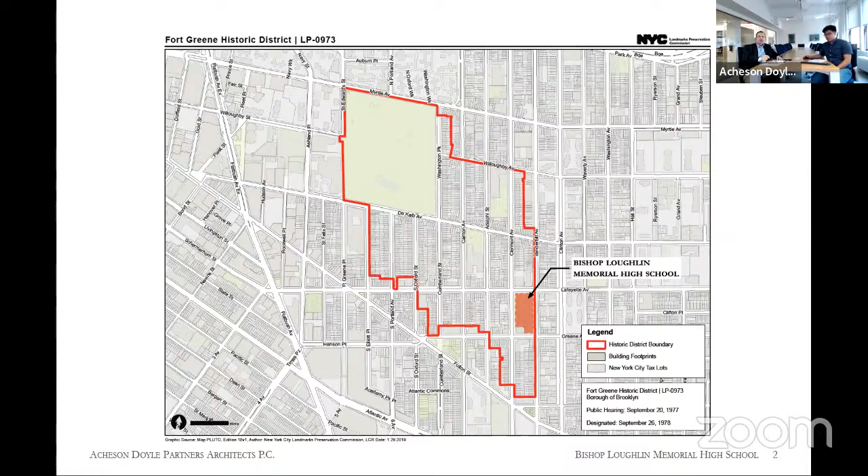So let's continue. Just to put it in context of the boundaries of Lafayette, Joralemon, Vanderbilt, and Greene, there's a large playing field to the back, large open space, which is a big part of the neighborhood.

And this shows it's in the company of some pretty strong neighbors. The Bishop Loughlin High School on Joralemon Avenue is on the upper portion, and you can see that was originally the main entrance to the building. Then when the field was closed off and the entry was put onto Joralemon to the right, it just fell into being used as access to the athletic fields.

Just before COVID, we finished about a 4-year program of all the facades. There were like 9 different facades restored under LPC guidance and great expense to the school, but it was done and it's being maintained. In fact, it looks even better than this in real life.

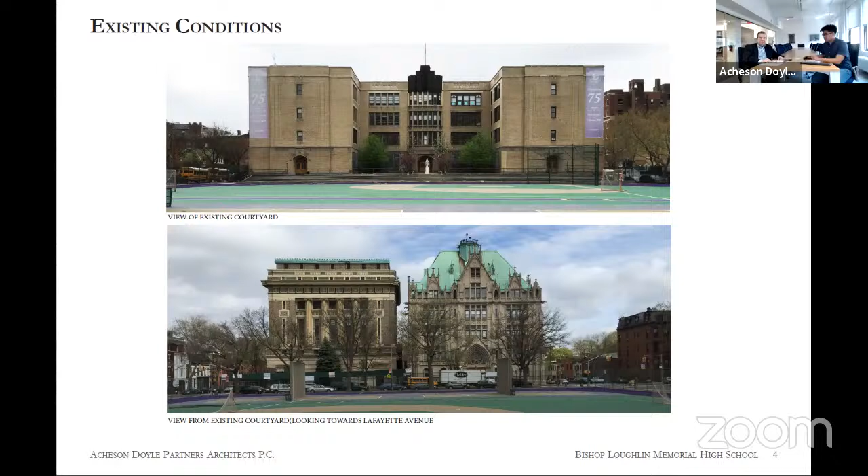And I did ask Andy to go into this portion. So we're going to go through a few of the existing condition photos. The first photo we're currently looking at is the area of the existing concrete bleachers, one of which we are proposing to remove to install an accessible entry to this courtyard and subsequently to the main entrance of the school and reactivate that space.

As Mick stated earlier, we just finished a previous extensive rehabilitation program for the school on the facades. So what we're looking to do now is provide access and entry into the space, as well as security lighting at the entrances to the doors on either side, as well as the main entry.

A few more existing condition locations, just to give context to where our existing lampposts are on each side, flanking the sidewalk, which is being done under a separate application that's already been approved, as well as looking out to Joralemon Avenue.

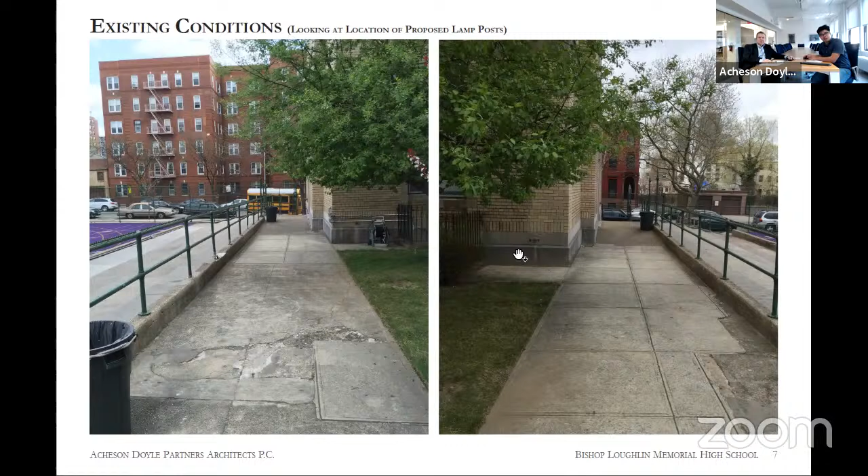This is out to Vanderbilt. A close-up photo of the existing decorative poles. We're confident these used to be lampposts at some point, as they are hollow and currently have crosses on them, but historic photographs of ceremonies show posts at the top, so we're coming back to reuse, salvage, and reinstall a post fixture at top.

A few more photos on the right. You're looking from the public right of way into this concrete bleacher area, and on the left we're looking from the upper courtyard toward the access to the field, which is the area we're proposing to modify.

This is the Joralemon Avenue entrance, which will be the main access to the school building. Those gates will be open. So just to give you context in the overall picture of the ramp and bleacher, here's what our intervention is.

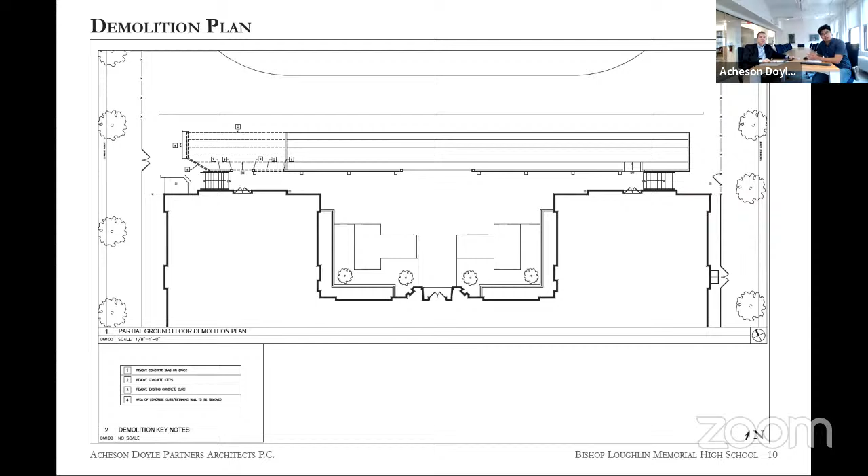We're proposing a very minimal section of the concrete bleachers used by faculty and staff to be removed, carefully integrating a switchback ramp within the parameters of the bleachers.

Due to the grades, we'll provide a three-part ramp that switches back twice, fitting within the existing dimensions of the bleachers so it feels proportionally correct, as well as providing some planting to soften the ramp.

It will be less visible, and we also found detailed drawings in the boiler room, as is typical for a school like this, of the structure of the ramp. If this can be cleanly done, the cutting out of the old bleachers will happen right at one of the column joints, so it won't be a massive cut—it'll be a more surgical removal.

The slope of the ramp will echo the slope of the existing bleachers, which are being repaired and restored all the way across with concrete. It's in pretty good condition actually, but there's a whole structure underneath the bleachers.

So this is just a quick detail blow-up. As I iterated previously, we have a three-part ramp, with some planting on the sides to minimize the visual impact, as well as a pretty standard railing detail for the ramp itself.

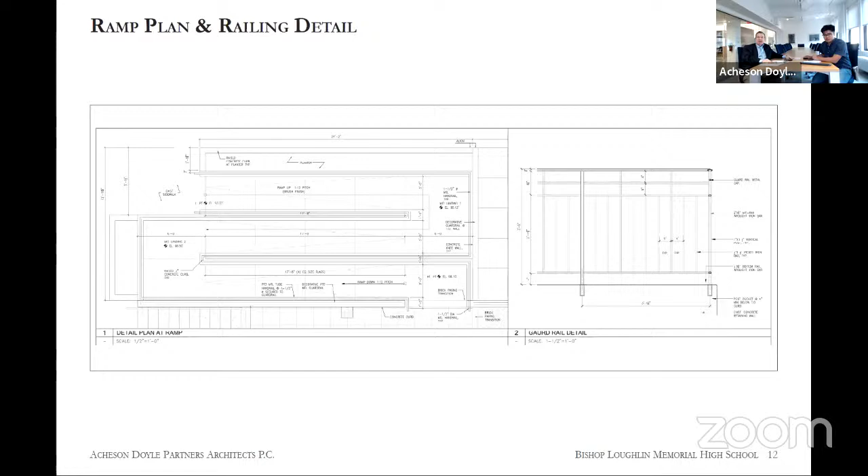So to give you context, we prepared a few renderings to show what we're anticipating the ramp to be like. This aerial view shows the wall sconces we're proposing, as well as the lampposts we're refurbishing with a new post top. This is again a very minimal intervention, and here's a bird's eye view of the space, contained to that portion focused on Joralemon Avenue, the main entrance for the students.

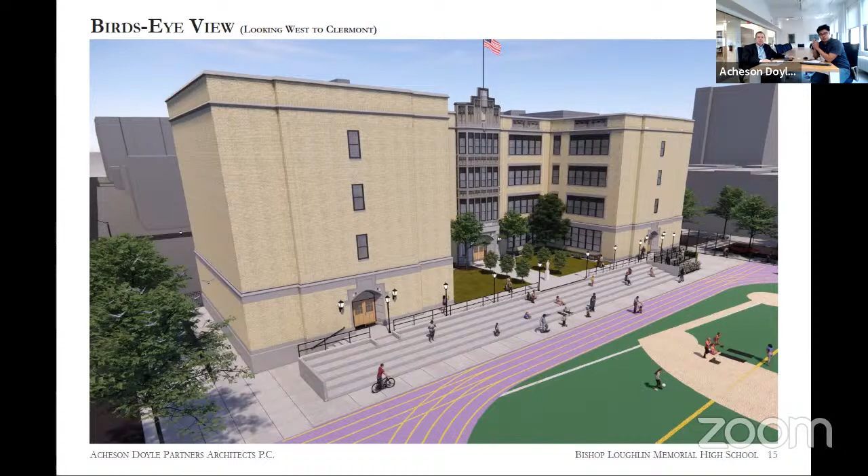We're going to go through two views, both from the Joralemon entrance. Coming into the field from that entrance, you'd see what we discussed previously—we'd have an arborist carefully curate the planting so it's not haphazard, and a ramp that goes up, as well as a stair, taking you up to one of the three entrances accessible into the main building.

Here's another view—you come in, and this is your ramp that comes up, following the person up, taking you to the courtyard level.

Just a side note, the contractor we're hiring for this concrete work is the one who did the great concrete work at Mount Zion on 145th and Convent Avenue. The other day, just as a total aside, at the Conservancy open house, I love it when a visitor drills down to a nerdy question like, who did that concrete work? Because it's important, and we feel this has got to be done really right given the rest of the building—they didn't scrimp on stone and have pretty nice masonry detailing.

A few views from the public right of way. This is from Joralemon Avenue across the street, looking at the proposed ramp. As you can tell, you can't really see it with the planting. It's very buffered. Next, another view from the proposed right of way, looking at the street. Again, it's a very buffered ramp, but you would mostly be focused on the field condition itself.

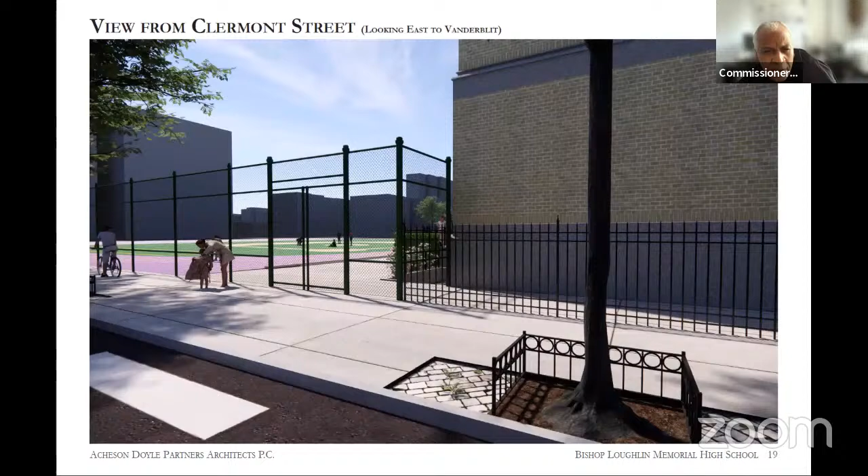Just two questions. You said this was a minimal solution, so I have two questions. One has to do with the ramp and the planting. On page 16 and 17, why do you have to cover the ramp with planting? That's question one. Question two, is there too many lights? The number of poles are quite significant, could the number of poles be reduced? Or do you need that technically to light the bleachers?

Well, I can answer the first one about the landscaping. We were just trying to make it a more attractive entrance. And frankly, Commissioner Jefferson, the next move, if money ever came available, would be to try to create a better gate than what's there, so that it feels more like a significant entrance. Right now, it's chain link.

In terms of the lamps, they're pretty much in the position where they originally were found. We don't need, technically, that many lights, especially since the lights on the building would be taking care of a lot of that. Well, thank you very much.

Thank you. But the poles are there and it's the tops that you're adding, right? Yes, let me just flip to the last slide here. So basically from the top here to the bottom here, that's the entire pole that we're salvaging, and then we're just introducing the light fixture, just adding some wire. And they're cast iron, and we're talking about adding two at the top of the bleachers, which were going to be replicated from the existing ones.

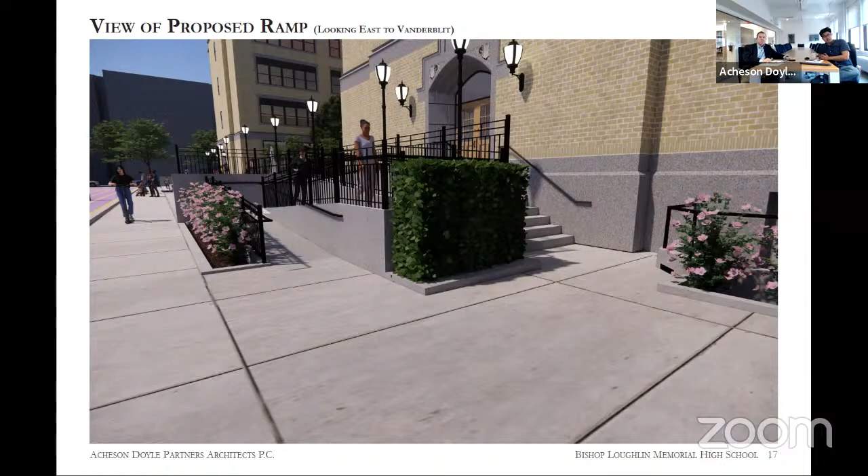So we did explore putting the existing type B fixture on top of that post, as well as talking to a manufacturer to potentially custom manufacture a piece, and both of those options were not viable for the existing pole. Okay, thank you for that.

All right, if there are no other questions, commissioners, I'm going to start sending you requests to unmute so we can close the hearing and begin our discussion.

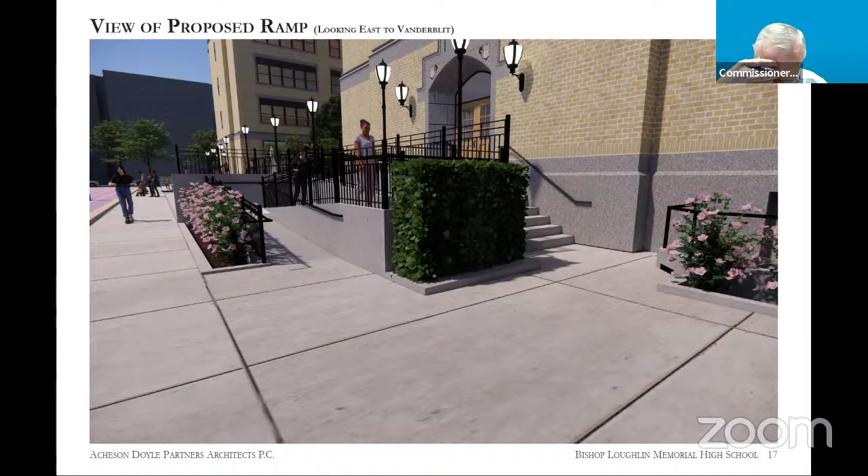Okay, thank you. Commissioner Gustafson? I'm willing to bet that this building was not designated for the concrete bleacher seating, which is to say the ramp, I think, is actually more attractive than the original seating. So I agree with Commissioner Jefferson. I think it's fine as is. I actually love the array of lighting coming across the front of the building. I think it's terrific. So I'm okay with it just as it is.

Okay, thank you. Commissioner Shamir Baran? I'm in agreement. I think every aspect of the proposal is appropriate. Commissioner Chapin? Yes, I agree with other commissioners that it is completely appropriate. Commissioner Goldblum? Agreed, it's appropriate. Commissioner Devonshire? Appropriate. Commissioner Chen? Same here. Okay, and Commissioner Bland? Yes, appropriate, all of it.

Okay, so I think we have a consensus to support. I do understand the comment about the planting in relation to the formality of the design, but I think planting can also work within a play area or a field area, so it could be okay as well. Commissioner Jefferson, are you comfortable making a motion to approve? Sure. Okay, great.

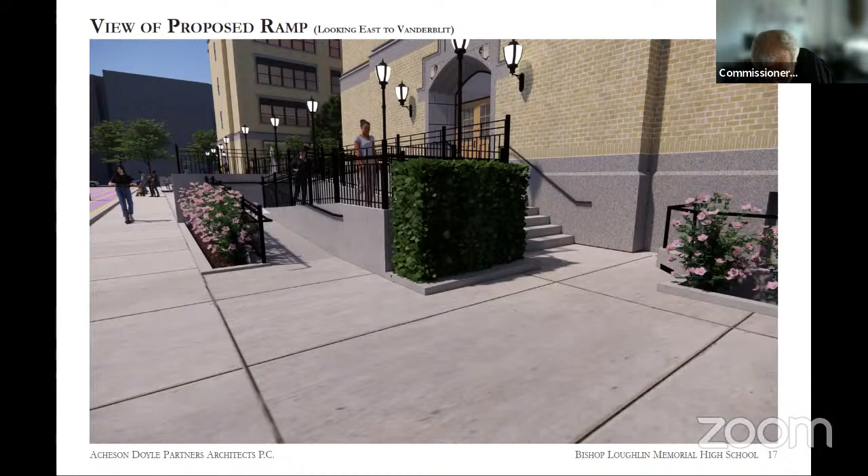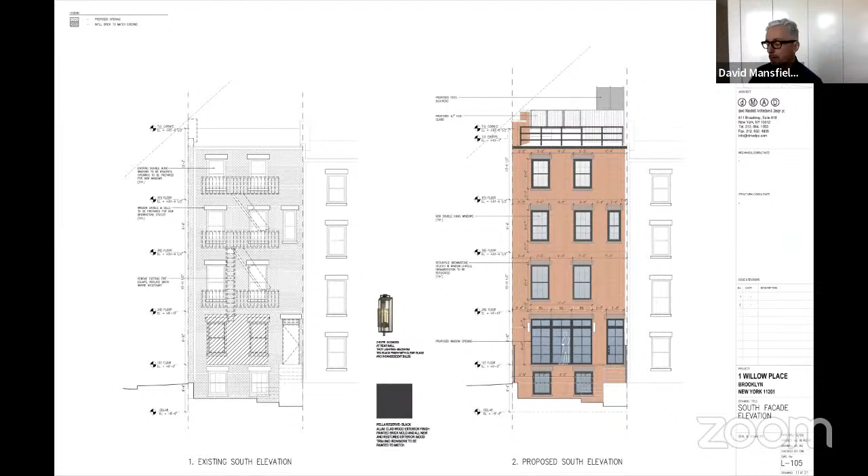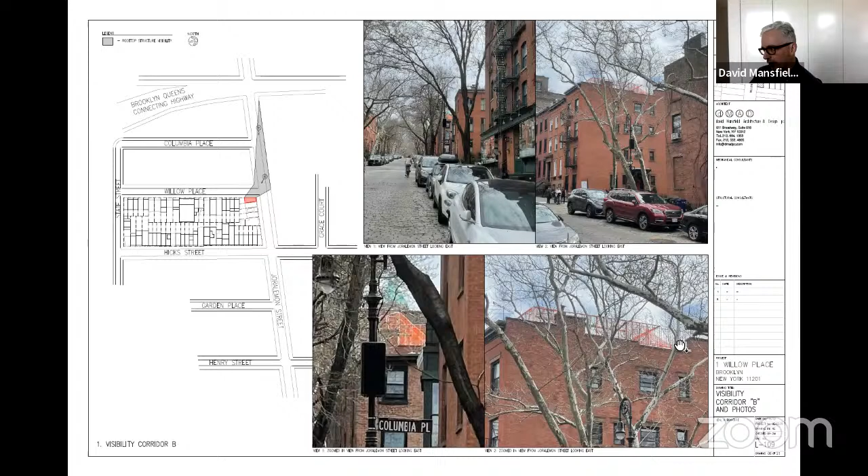Then we go to the view from Joralemon Street, which again shows the change in elevation, because this is heavily sloped. We see in this photograph the orange of the mock-up. This is again a zoomed version of that. This is a view further down the street, from not across the street, but close to across the street, and you can see here also the zoom version.

Here's a photo composite, which might be more helpful. This is the bulkhead in mock-up form.

This is the proposed elevation. You can see here we've changed out the windows, taken off the fire escape, and the exterior of the bulkhead will be a sort of dark gray metal, similar to a zinc color in sheet metal steel, in standing seam, so it'll blend generally with the sky.

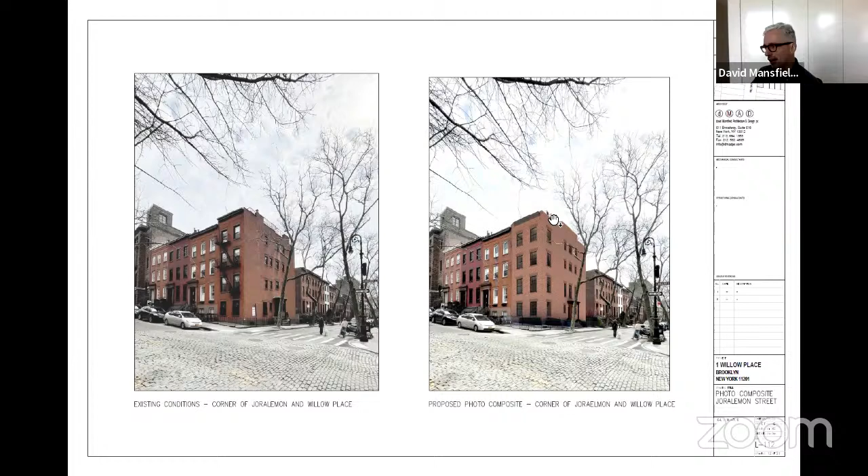Again, here's some photo composites showing the existing house with the mock-ups, and then also the new reorganized facade, the corner windows. Hopefully your resolution is a little bit better than mine, but we put a person up on the roof deck with this open steel rail.

And we are also putting in a new fence here, which is aligned with the property line of the property. It's 6 foot high, we have a detail of that. It's basically a wood painted fence with narrow open slats, vertical. So essentially it's a privacy fence, but it's not completely opaque.

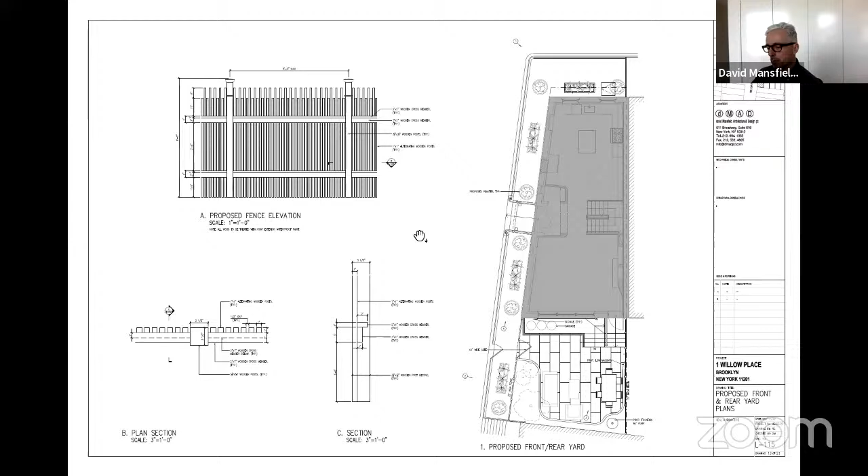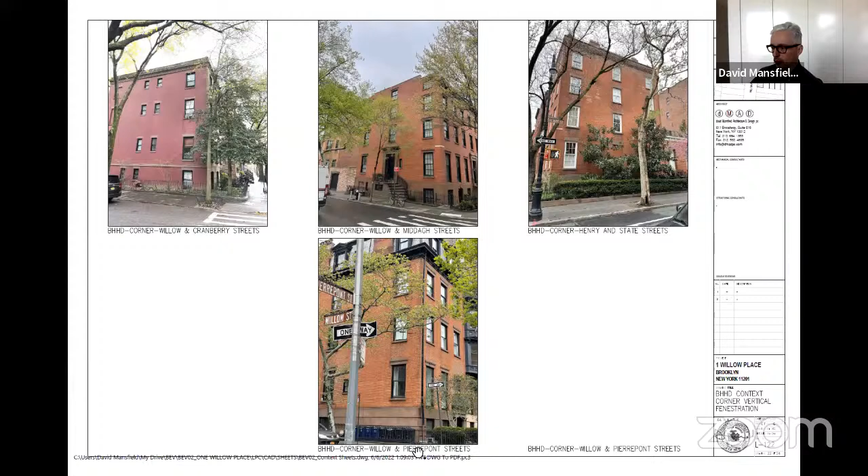In addition, because we had talked to Brooklyn Heights Association about the appropriateness of two things: one, the parapet line, the removal of the chimneys, and the work we're proposing to basically level off the roof line and also project the parapet up to create a sort of centralized symmetry to the side facade and the entrance facade. So here are some examples of houses.

This is a house on Joralemon Street facing Henry. It has the entrance on the side, on the long side, and the roof line is not expressed - in other words, it's level. This is also the same house here. This was LPC approved in 2013.

Here is an example of like a T-porch, which is a highly glazed, open design that overlooks the public thoroughfare. So we think that this is a good reference.

Here's a similar fence. In addition, we have 2 Sidney Place, which is again a narrow facade facing one street, and the entrance is not there. And on the side elevation facing Joralemon Street, there's a very elaborate entrance, although it's not centered. And also there is a raised parapet portion on this.

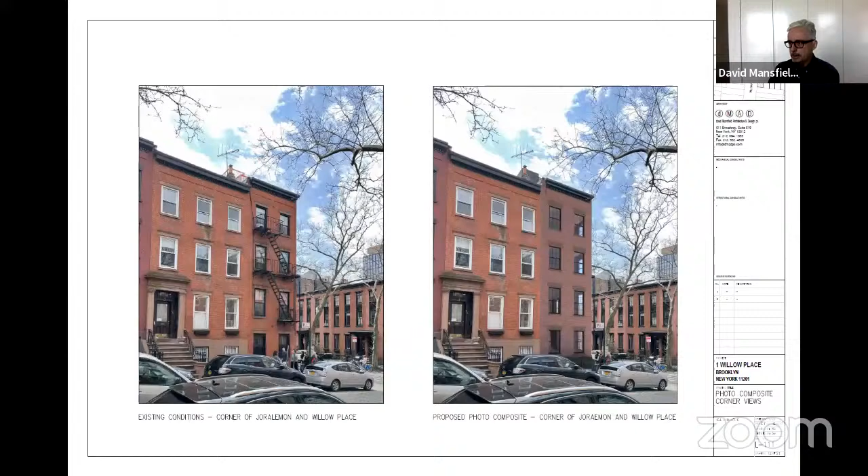That had occurred to me, so I understand what you're doing now, at least, which is wrapping around, taking the language of Joralemon around the corner to Willow. The drawing number is 104. Sorry, and then 103. I'm sorry, 102, my apologies.

And if it's not the case for some reason - so it's six foot eight on... so we continue that around. Okay, but the width is the same? It's just the height is taller to reflect the parlor condition on Joralemon. Okay, yes, thank you. I thought that might be the case, but I wanted to understand if that was your reasoning in creating that larger window. Thank you, no problem.

Thank you, any other questions? Yes, Commissioner Jefferson, please go ahead.

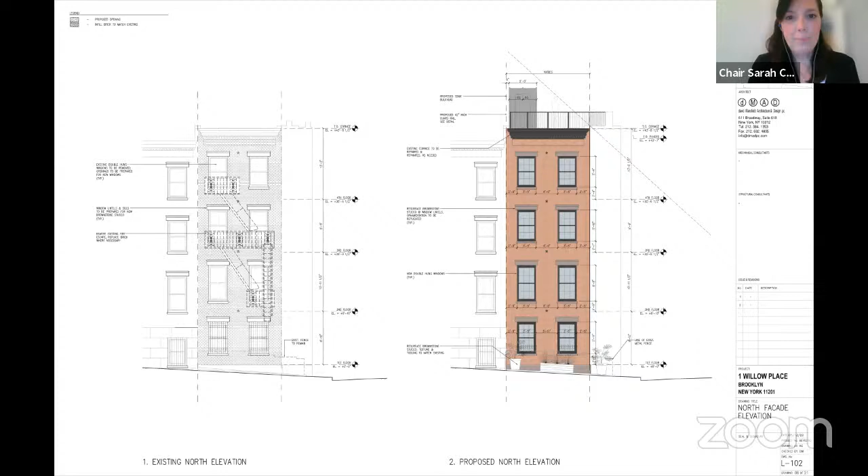Did you talk about the issue of the porch? The installation of the porch at all? Probably not enough.

So the porch pre-exists our owners purchasing the property, and we were actually surprised to find out that it had not been approved. It seems, based on the age of Brooklyn Heights Historic District and the fact that it's not showing up in the 1980 tax photograph, that it was added while the area was a historic district. So we're asking for it to be legalized.

There are either pre-designated or during-designation additions, which are sometimes tolerated, and this is obviously one of these that we were surprised to find out wasn't. I think the Brooklyn Heights Association is okay with this, because one of our points was to really get their opinion on it. They're okay with it being there.

Their problem was that it's potentially a Greek revival porch, and maybe if I can zoom, or Carolyn, you can go to some of the existing photographs, which would be at the start of the presentation. Maybe the next sheet.

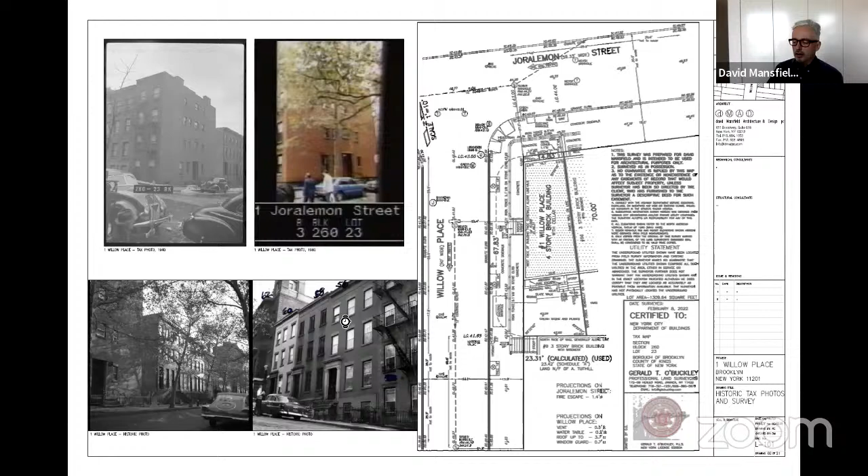The porch is a carbon copy of two porches across the street. I don't know if you can zoom in, but the two houses across the street, which I believe are 2 and 4 Willow Place, are sort of Gothic revival from the same time period, but they have this Davisian window pattern, and they're sort of unusual for the area. So the new porch is actually a carbon copy of that.

While it's not appropriate, because our house is Greek revival, the Brooklyn Heights Association can tolerate the fact that it adds a porch to the facade — I don't want to speak for them — which can be done on a Greek revival townhouse. It may not be detailed in the exact way that's appropriate for our house, but they're okay with it. Thank you.

Okay. Other questions? And then I just had one last question.

Are the new windows aluminum clad wood windows or wood windows? They're aluminum clad. They're Pella Reserve with OG moldings.

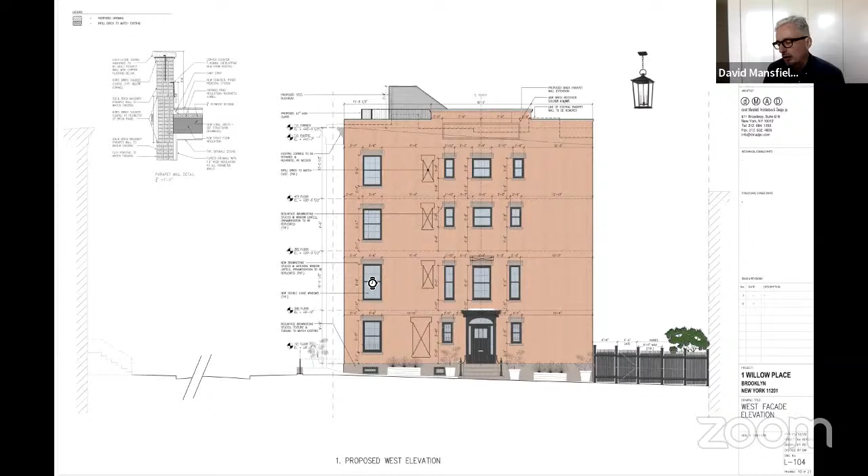On the fenestration, the window at the back, I think that's pretty straightforward. It's self-evident that we're enlarging this opening. We've reduced it significantly. It isn't a primary facade, and there's an image coming up which will show how much is visible. The issue of privacy is not a concern of our clients. They do understand that the light from the space, the ceiling, will be visible from the sidewalk.

In terms of the loss of the chimneys, we don't know when they were abandoned, but there are currently no fireplaces in the house. So the chimneys are, of course, potentially a feature of the facade, but there are very few instances—having spent a lot of time walking around Brooklyn Heights—of end-of-row townhouses expressing the slope of the roof. It's not generally typical.

We don't necessarily agree with the idea that having a sloped parapet and exposed chimneys is typical for an end-of-row townhouse in the Brooklyn Heights Historic District. Maybe in other historic districts or neighborhoods in Brooklyn, but generally in Brooklyn Heights, the end facades are treated in a more significant, substantive manner.

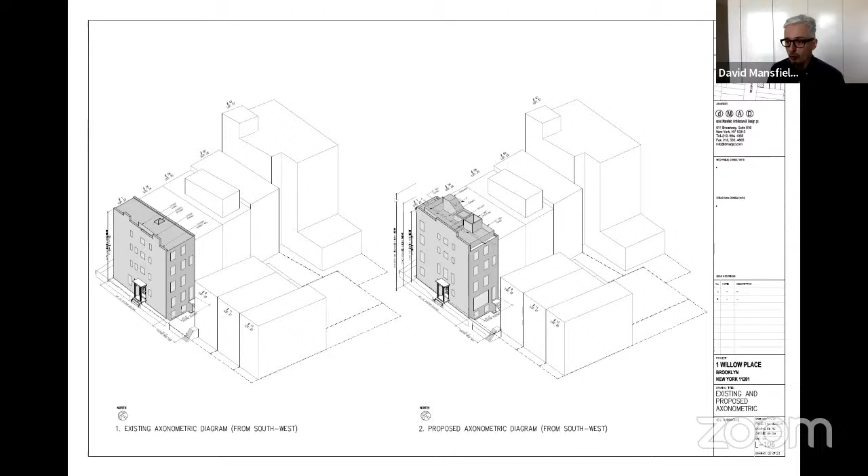In terms of the porch presentation, we apologize that there aren't any detailed photographs of the porch. I can't share them with you right now. Obviously it's available to look at on the public thoroughfare, but I understand that's not easy for everyone. The porch is there and visible in some of our photographs, but it's true it's a little bit lightly detailed.

Okay, commissioners, do we have any final questions? Right, I am not seeing any final questions. Whoops, oh Commissioner Gustafson, I just muted you. Sorry about that, I'm catching you all as you're unmuting yourself.

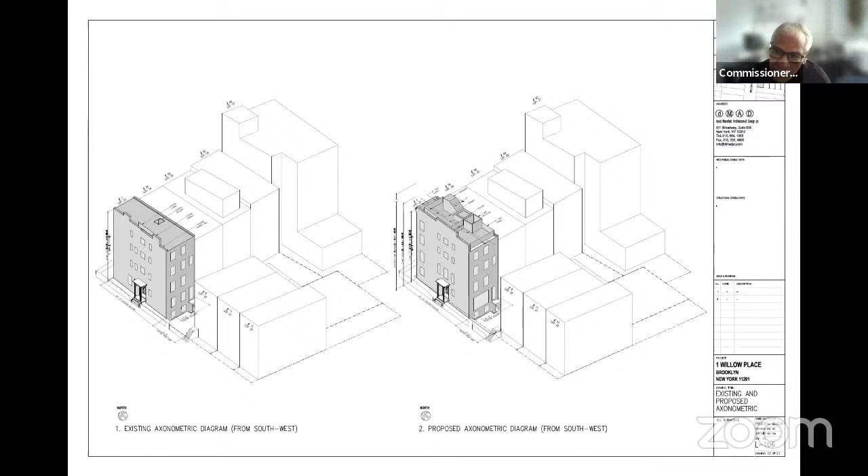I agree completely with Commissioner Bland, but I do think that they need to study that rooftop bulkhead a little further.

I feel the same way, agree with everything that Commissioner Bland has said, and would like for them to study further the rooftop addition—I mean, the bulkhead addition.

Commissioner Chapin: I agree with Commissioner Bland as well. I also think they should work with the staff to see if the bulkhead can be reduced. I also agree they shouldn't be forced to use a ladder arrangement instead. This is a corner where there will be a visible accretion on top for any kind of bulkhead, so they could work with the staff to try to minimize it.

Obviously, I felt like maybe the window should be reduced, that parlor window, because I thought it called attention to itself. But this was an existing, rather eccentric window arrangement to begin with. So since none of the other commissioners find that particularly troubling, I can go along with this just as it is, except with the proviso that they work with the staff on the bulkhead.

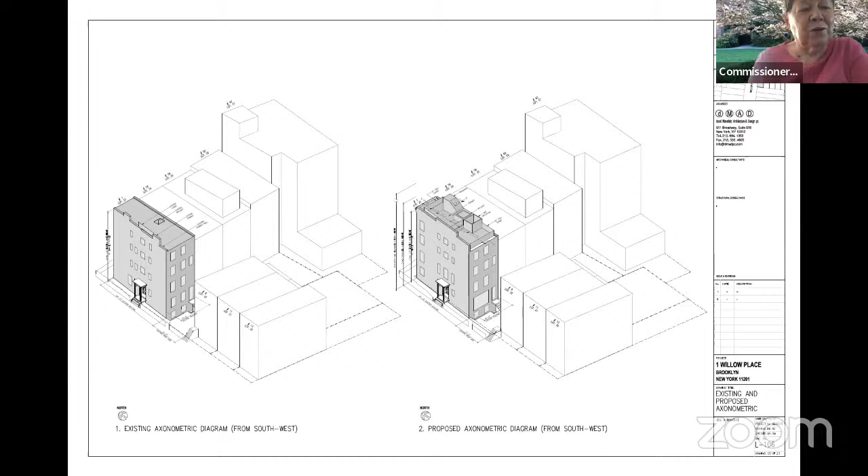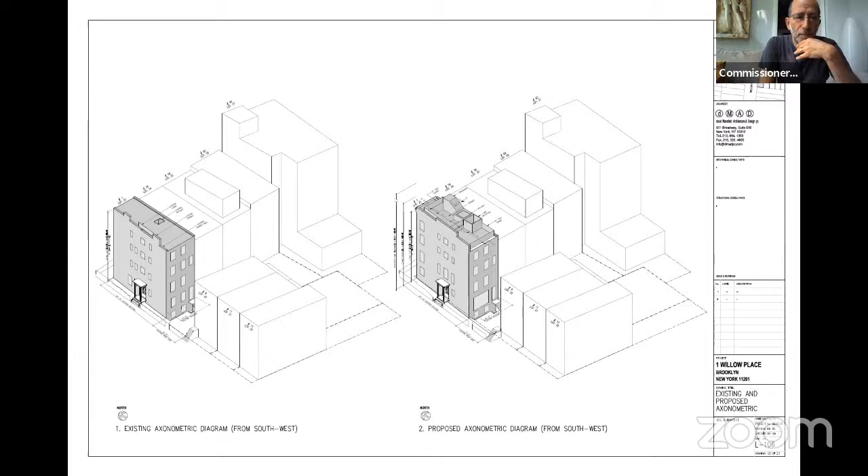Commissioner Goldblum: No disagreement. I apologize if I missed this, but if you just kept the stair winding straight up, it would result in a 90-degree rotation of that bulkhead, pushing it further into the middle of the building, which would achieve some of the goals the other commissioners noted, unless there's some reason I didn't hear for not doing that—there's just a big skylight that would have to become smaller. But if that doesn't work, and I see the applicant raising his hand, whatever, I agree with what everyone else says.

Commissioner Devonshire: I agree the bulkhead should be much less visible. I'm okay with the changes to the parapet. I'm okay with the addition of corner windows. I agree with the Brooklyn Heights Association comments about the rear opening—I think it's not concealed within a donut, and it's far too visible, and having two enlarged, smaller punched openings would solve that issue. I don't really think we have enough information to approve the porch.

Commissioner Chen: I agree with Vice Chair Bland and most of the commissioners are concerned about the bulkhead on top. If the applicant can, as Michael Goldblum or Commissioner Jefferson suggested, somehow reduce the bulkhead, I think that would be ideal.

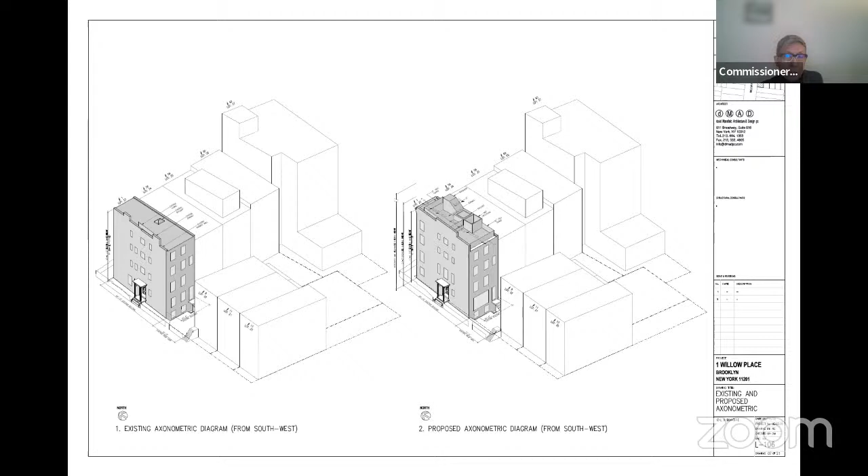So I think we've had some very good comments, and we actually have a majority who would support it, with the provision that they continue to work with the staff to explore ways to reduce the visibility of the bulkhead.

I was at a site visit recently looking at a bulkhead this commission approved, and we happened to go to the roof through this bulkhead—it was one of the sliding glass, mechanical sliding doors that rolls back. The slope was in the opposite direction of the stair run, and when the roof just slid away, you could walk up the stairs and walk out.

So that would not even involve changing the stair run here, if you could do something like that. But as Commissioner Goldblum noted, there are also opportunities to change how the stair comes to the roof. So I think we'll have the staff continue to work with them on that, and I will go ahead and make this motion.

Okay, in the matter of docket number 22-07520, 1 Willow Place, in the Brooklyn Heights Historic District, a Greek Revival style house built in 1849. This is an application to construct a stair bulkhead and install other rooftop elements, alter the parapet, modify and create window openings, and legalize the installation of a porch without Landmarks Preservation Commission permits. I note that the building style, scale, materials, and details are among the features that contribute to the special architectural and historic character of the Brooklyn Heights Historic District.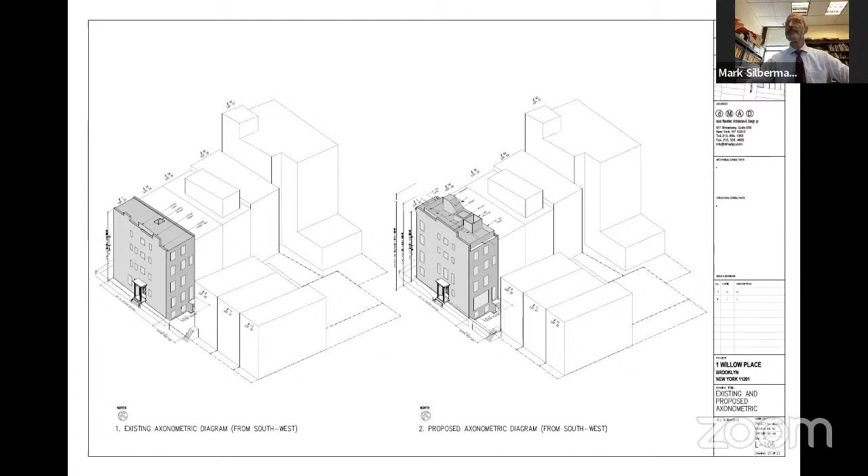So that's approved with the condition that you continue to work with staff to explore ways to minimize the visibility of the rooftop bulkhead. Thank you.

We'll move to the next item now. The next item, Commissioners, is item number 3, docket number 22-09843, an application for a certificate of appropriateness in the Borough of Brooklyn, 356 Hoyt Street in the Carroll Gardens Historic District, Block 450, Lot 41, a stable designed by Stanley S. Covert and built in 1881. The application is to modify facades, enlarge openings, install infill, and construct a bulkhead.

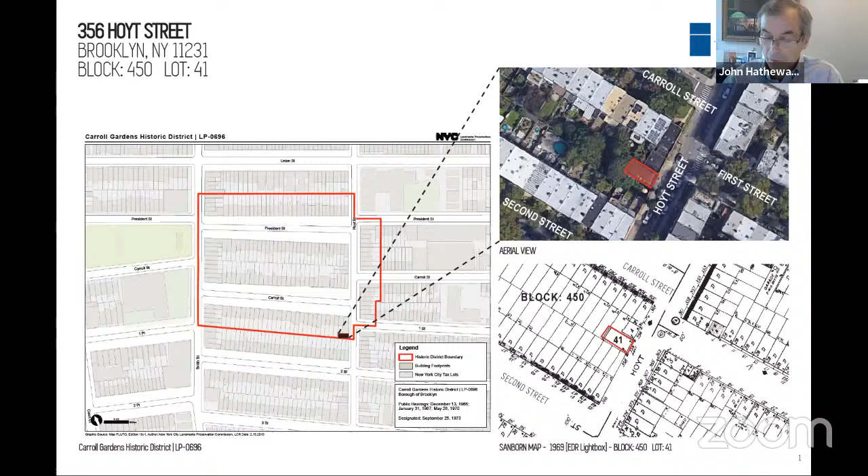356 Hoyt Street is in the Carroll Gardens Historic District at the very southeast corner of this small 2-block district. As you can see from the block plan, it is essentially a freestanding building at the short end of a block. The building has an interesting and unusual history for the neighborhood, having first been built as a stable and then later converted to a mixed-use building with a store at the first floor and residence above.

Over time, the store, seen here in the 1940 tax photo on the left, was reduced as a second apartment was created in the rear. Eventually the store was eliminated altogether, as seen in the photo on the right, during renovations in 1959, when a Certificate of Occupancy was issued for a 2-family dwelling.

We propose and request approval for work at the roof level, the north and south facades, and the first floor front facade as a part of the renovation. It will make 356 Hoyt a functional building for a family with young children.

The two top functional priorities for this project are creation of useful outdoor space and making the building energy efficient. The lot has just a 2-foot deep rear yard that is mostly occupied by light wells for cellar windows. Therefore, we propose to use the roof as private outdoor space.

All four walls of the building are exposed and uninsulated, and we intend to comply with the 2020 Energy Code standards for new construction. As such, providing a layer of continuous insulation on the north and south walls is important for us to meet that. You can see in the original tax photo it was brick, not a finished brick. We'll have more about the condition of those side facades in a minute.

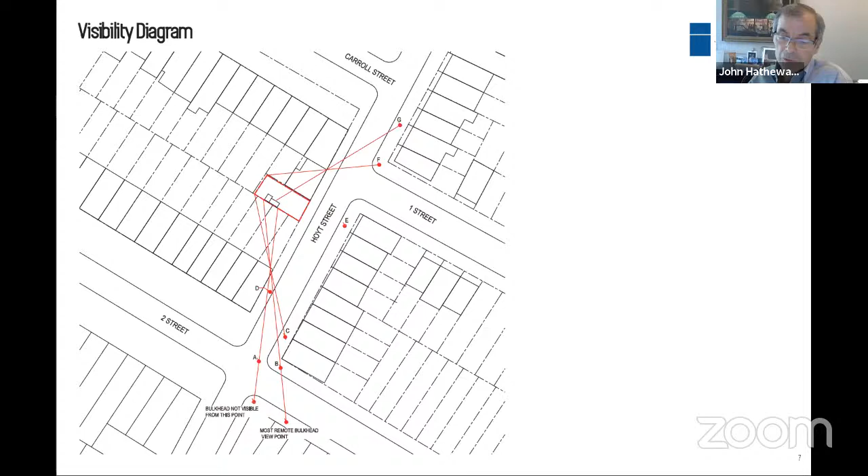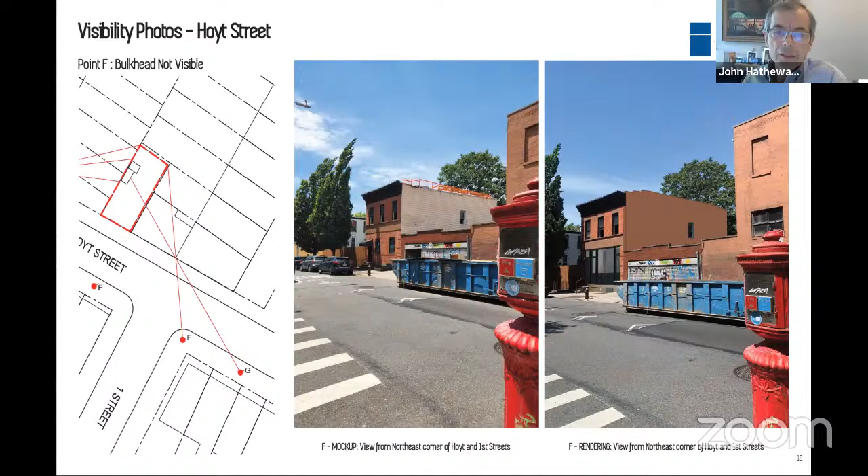Then from the north side, viewpoint F shows where the entire facade length would be visible across the street. Point G - it's coming here, I think - oops, I just skipped two. Point G is the northernmost location where any part of the bulkhead might be visible, and of course it's designed not to be visible.

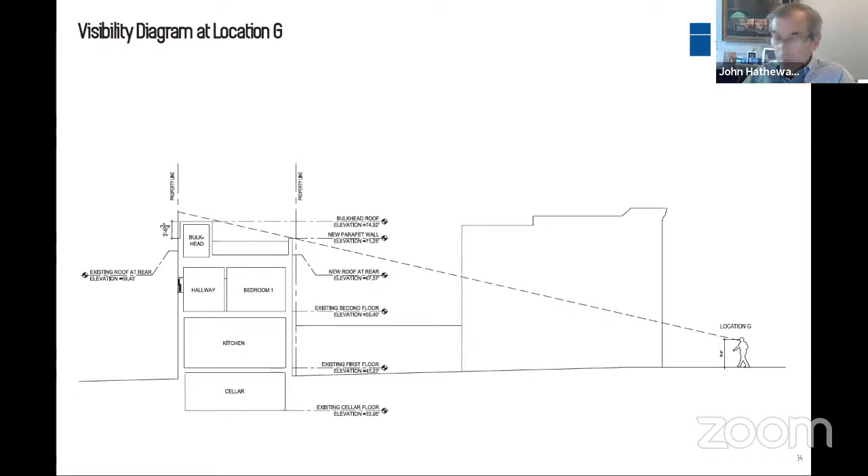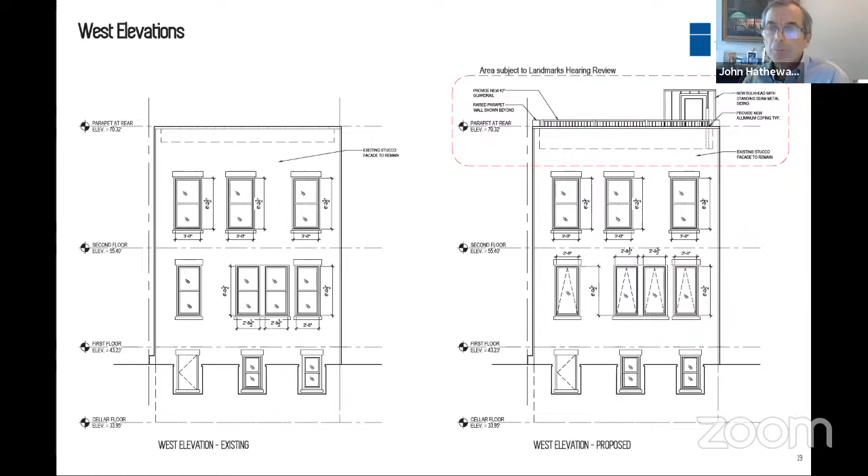The rear facade shows the roof top work. And then moving around to the south facade, again, existing and proposed.

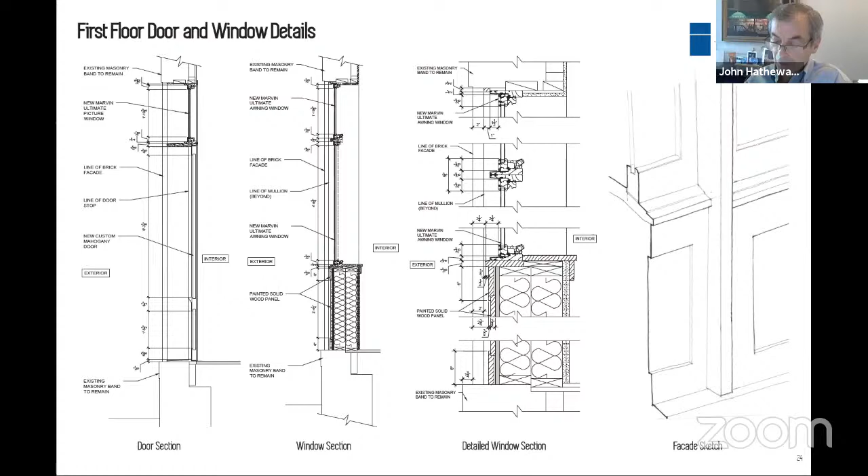Here we have a section through the door, a section through the window, and a detail section through the window. The sketch on the right shows how the vertical mullions are used to inset the center window by 2 inches, further articulating that part of the opening. These plan sections also show this play in the depth of the facade.

The current siding leaves wide bands at the corners of the brick facade that form an unwanted frame. With the insulation terminating 6 inches back from the facade at that hinge point, it allows the stucco to cut back and then be applied only straight to the brick in that last 6 inches. The stucco terminates at the front facade corner with a chamfered edge.

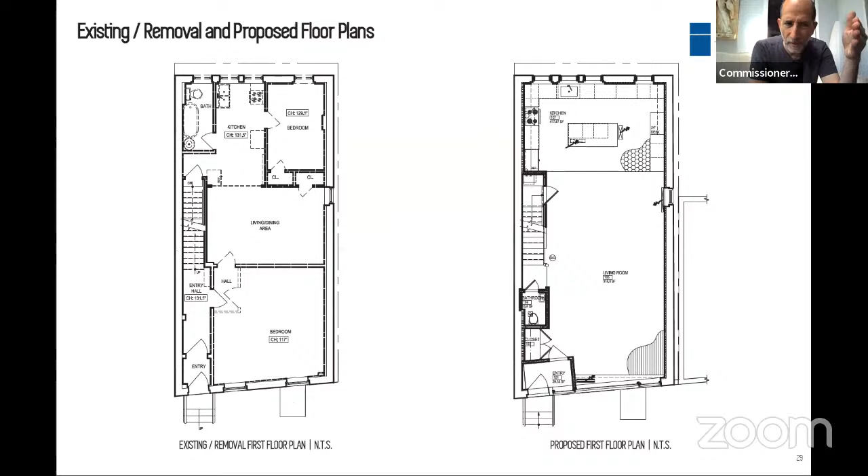The edge of that little return that we've been talking about a lot shows on drawing 25 as exposed brick, but then you're covering it over with stucco with that little chamfered edge. Is there any reason why you're covering it over? Yes, well, there's two reasons, and one I have to admit is an error on my drawing to say that it's exposed brick. It was our original intention to expose the brick, but trying to strip this tar off without damaging the brick seems to be almost impossible.

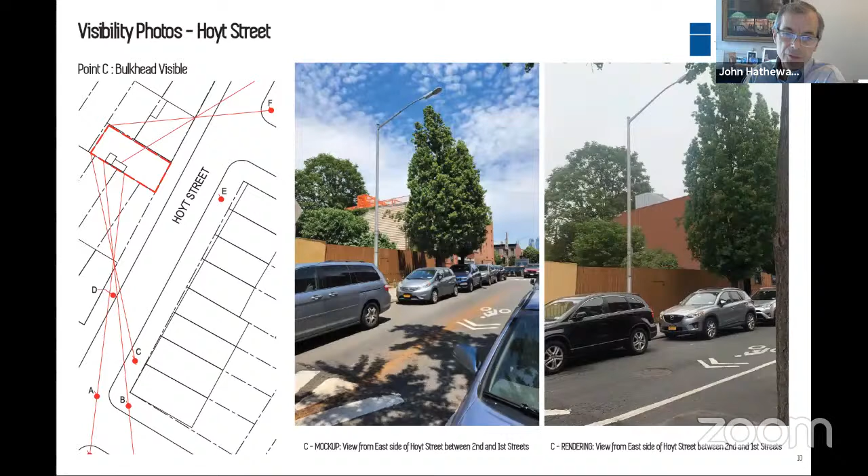I'll also say that the brick, whether it's because it had started to deteriorate or not—I'm going to flip back to an existing photo here to show you this—is not even. Hold on, I'm just about to get there. Sorry, I've got to go all the way back through these visibility photos. This is one of the real concerns in this thing, is how to deal with that brick. Again, the photo with the center photo there, where I have the blue tool in my hand trying to pry the tar off the brick, you can see that the brick is not exactly even there. And this is, again, just above the parapet wall of the garage.

Got it. Opening there, I see it. All right, thank you very much. Okay, other questions?

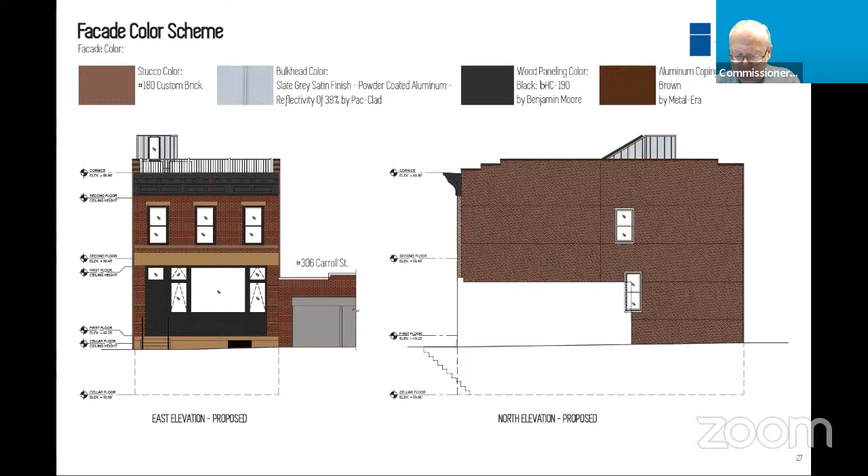The next item, Commissioners, is item number 4, docket number 22-08731, 6301 12th Avenue, also known as 6301 to 6323 12th Avenue, and 1202, 1216, 63rd Street, and 1201, 1215, 64th Street, the Angel Guardian Home, an individual landmark.

This is an application for a certificate of appropriateness in the Borough of Brooklyn, Block 5739, Lot 1. A Renaissance Revival Beaux-Arts style orphanage building designed by George H. Streeton and built in 1899, with additions built circa 1910. The application is to remove religious iconography, including crosses and stained glass, replace entrance infill and windows, construct a rooftop bulkhead and courtyard additions, install rooftop mechanical equipment and railings, modify and remove ironwork, install a fire stair and ramp, alter the hardscape and boundary walls, and install signage and light fixtures.

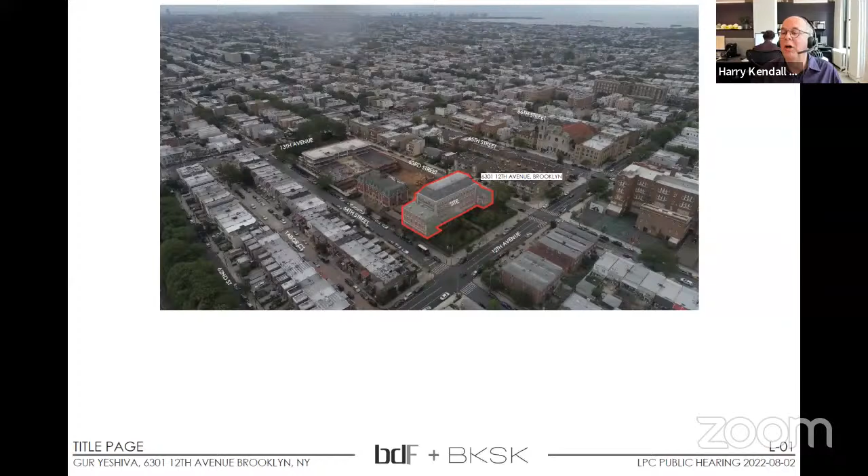So let's move on to the next sheet. This is to orient you: the main front of the building is on 12th Avenue, with side streets 64th and 63rd Street. And the building, as you'll see, has a main building and two wings.

The red dotted line represents the limits of the protected site. It's important to note that the orphanage originally occupied a full block, was a complex of buildings, and the front yard was able to be more of a contemplative outdoor space, while recreation happened in the rear yard. That's not available to the school, since it's not part of the protected site. So the yeshiva, which also needs outdoor space, will be making use of the front yard for a wider range of activities than it historically has been.

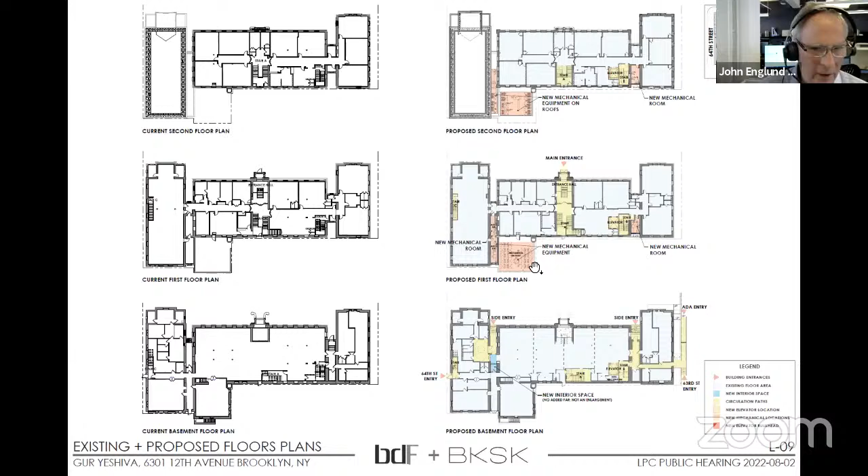And as we move up through the building, you see essentially more classroom space. It's also worth noting that every single floor on this building is devoted to classroom space. At the roof, we're proposing the placement of a few exhaust fans and the elevator bulkhead, which is reduced to the lowest height that the elevator mechanism can tolerate.

At the front of the building, not many profound changes. We're delighted that since we're not placing much equipment on the roof, we can remove this existing fence and restore the building to something closer to its original appearance. And because this is an orphanage converted to a yeshiva, we're proposing to remove the Christian iconography.

On this facade that consists of crosses on the dormers and some details which we'll get into when we get closer to the entrance. The school is proposing to put some lettering on the front of the building identifying the school, and in some cases the entrances, and the precise location of speakers and security devices is still under development. You can see here these elements are indicated in green, and these are probably not their final locations. It's something we still need to develop.

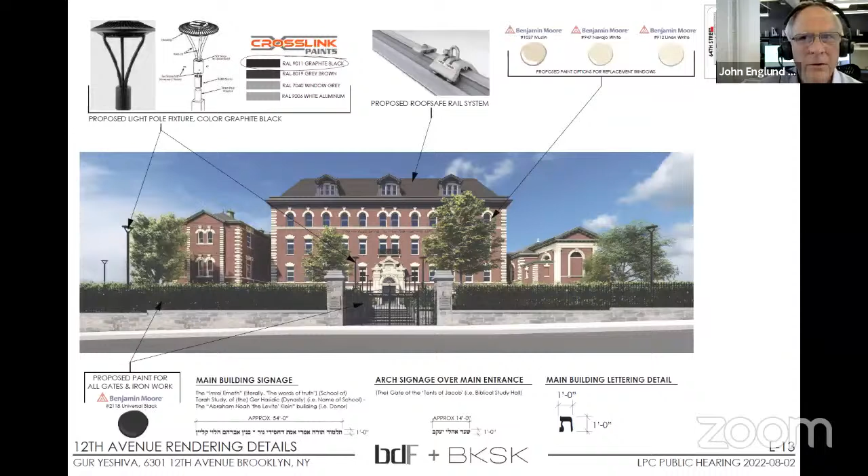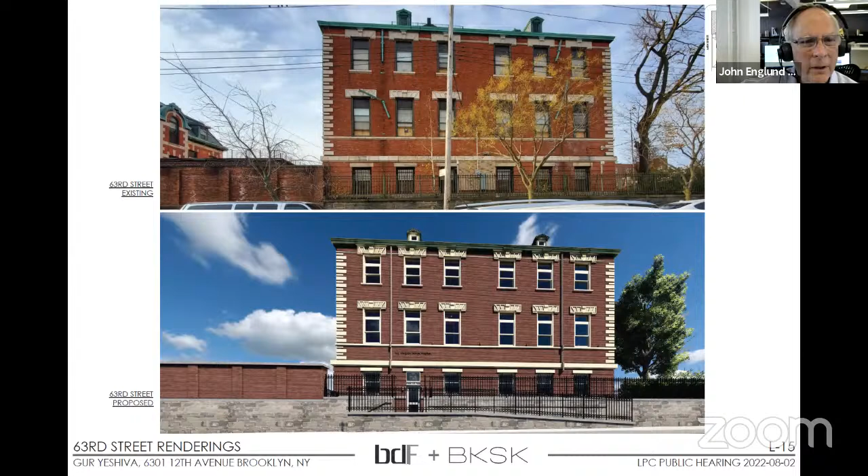A rendering of this facade showing the ramp, which we'll look at in a little more detail in a moment, and the windows. Here are a few indications of the leader material and the signage, which we're proposing to be pin mounted so as to be able to attach only to the brick joints and not damage the masonry.

The ramped path up to the building and up to the front yard will be lit with step lighting, which you can see here on the left. And then there are some small uplights and downlights arrayed on the side of the building, which are here and on this cut, which will provide some additional lighting in the side yard and light up the building.

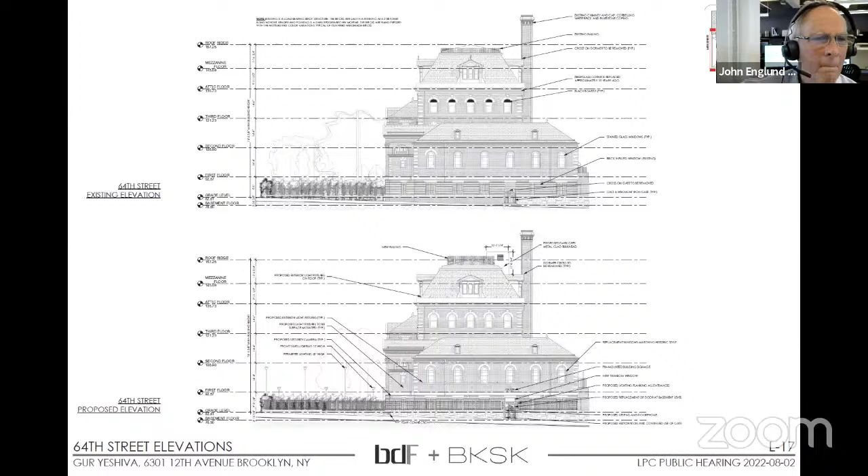On the opposite side of the building on 64th Street, we have already an existing opening at the street level, which we're modifying slightly to make it wheelchair accessible. I should say that this elevation mistakenly shows the roof guard remaining. This is a remnant of an earlier concept, and that railing, shown here, is proposed to be removed. So here we have a rendering of that elevation showing, in fact, the guardrail gone.

And a proposed treatment for the leaded glass windows, which you can see on the upper photograph, in what was the former chapel.

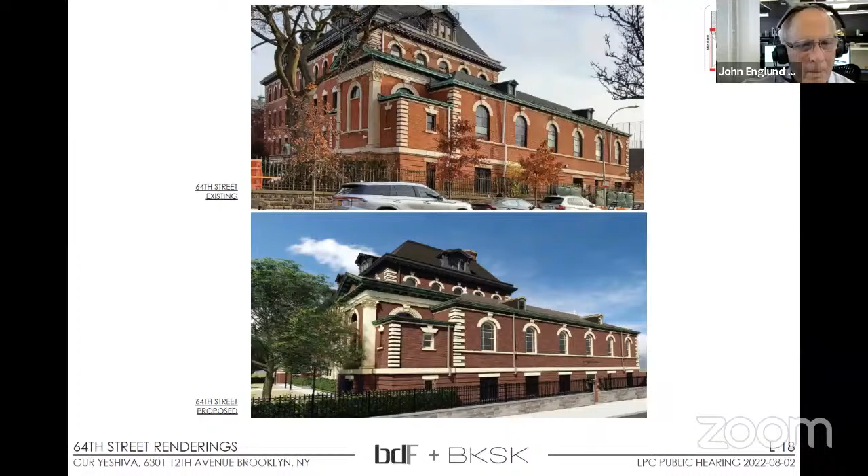Here we have an elevation, a rendering of that building, this side of the building showing the modification to the entrance, which requires removing two steps, making the door a bit taller, but basically retaining the configuration of the building. And again, some lettering above the door and some lettering in the transom bar over the door announcing the name of the entrance.

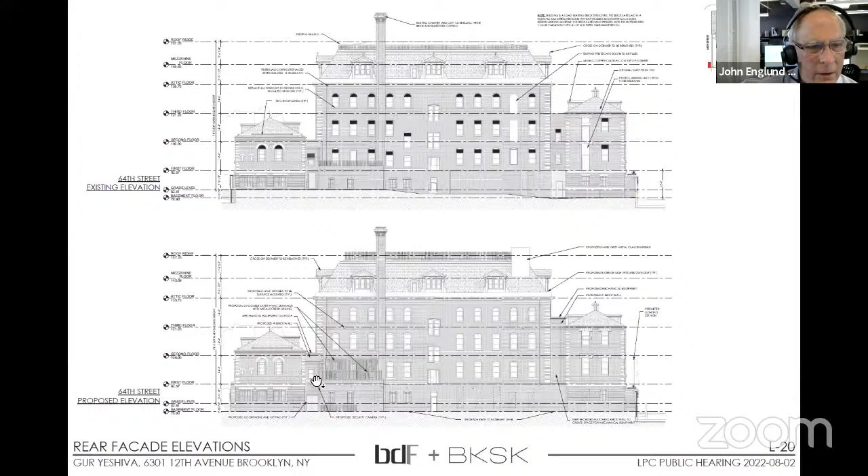The back of the building, as we noted in the photograph, is pretty irregular and heavily scarred by additions which have been removed and a fire escape which has been removed. The school is proposing to regularize these openings to better serve the classroom function. And you can also see here on the right, which we'll look at in more detail, a new brick infill to create some mechanical space on every floor. And over here is the addition of mechanical space on the kitchen elevation.

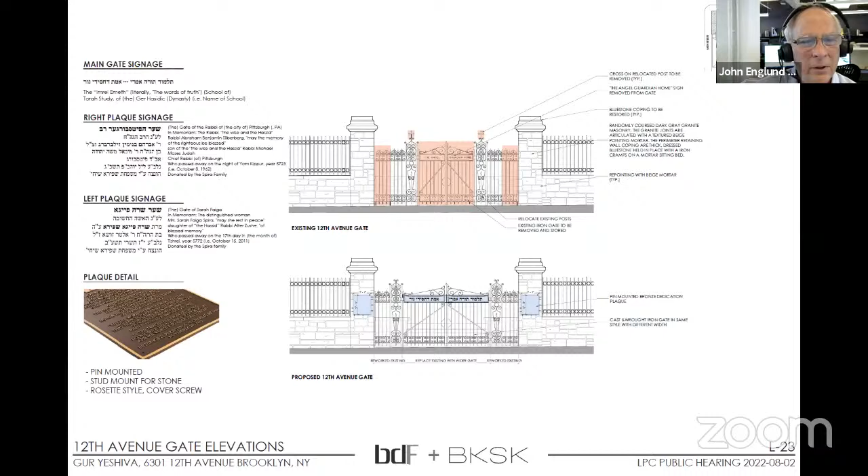The stairs, which are currently in ruinous condition and I suspect not original to the building, are also very steep and close to the gate. So the school is proposing to extend these stairs and the flanking walls into the site to create a much more gracious and easily navigated entrance in and out of the school.

I should also say that the school has hired Mary Kay Judy, a building materials preservation specialist, to do a paint analysis of the existing remains of windows and window guards. She has reported that the original color of the metalwork she examined is black, and that's the color we're proposing for the fence and the gate.

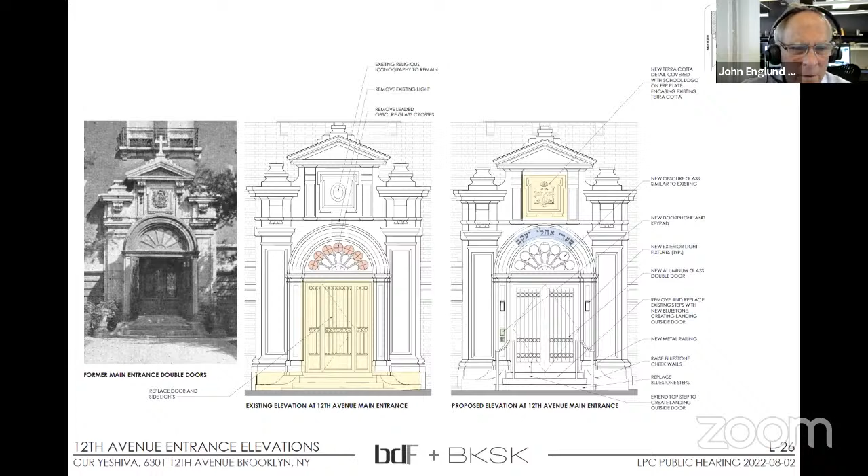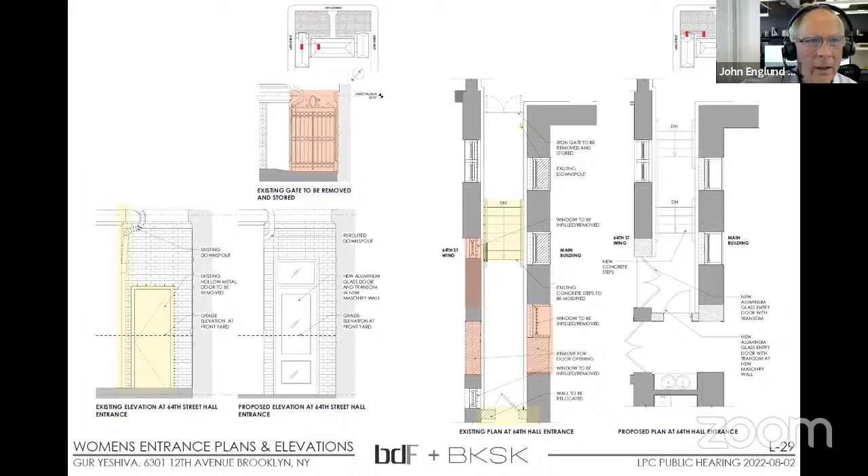You're seeing a new door in the same location as an existing window. We're just cutting it down and adding a door and transom. It's the same basic approach on the other side.

We're proposing to excavate and step down. It's the same story on this side: we have a gate which can't open because of the location of the leaders coming off the roof. Behind the gate on the left is a canvas vestibule, which we're proposing to remove, and then excavate down to the basement level to a door, giving us access to the public assembly space.

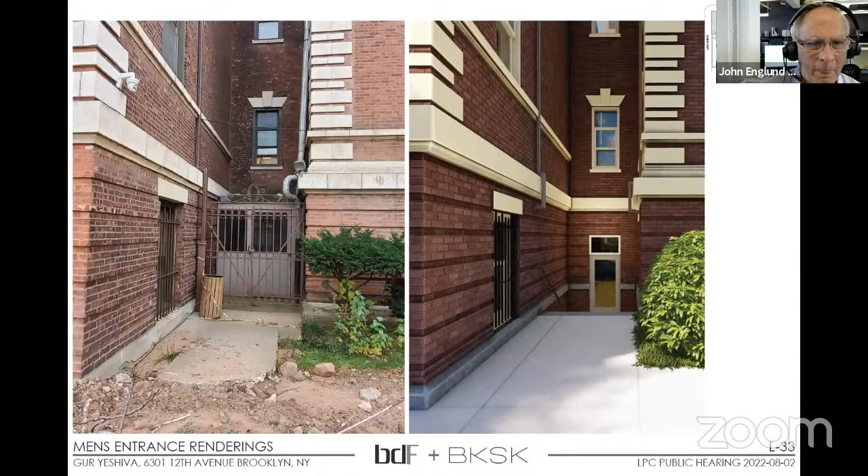On the 63rd Street side, we've seen this ramp already. The ramp comes up from 12th Avenue to the basement level and into the building, and then continues up to the front yard to give us wheelchair access to the play space. This requires taking this window opening and cutting it down to the ground and installing a new door with transom light, which you can see here.

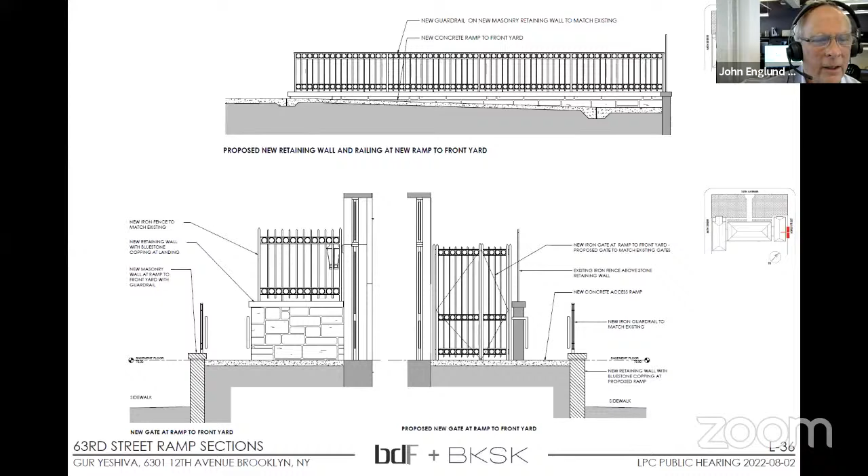And some secondary retaining walls and iron fencing, all designed in the same spirit as the existing fencing around the building perimeter. Here you can see on the top the existing condition, and on the bottom the existing retaining wall cut down and the ramp installed on the sidewalk.

Breaking up. I'm sorry. Sorry, go ahead, it sounded to me like you were breaking up. I wanted to make sure everybody else could hear you. Am I coming through clearly?

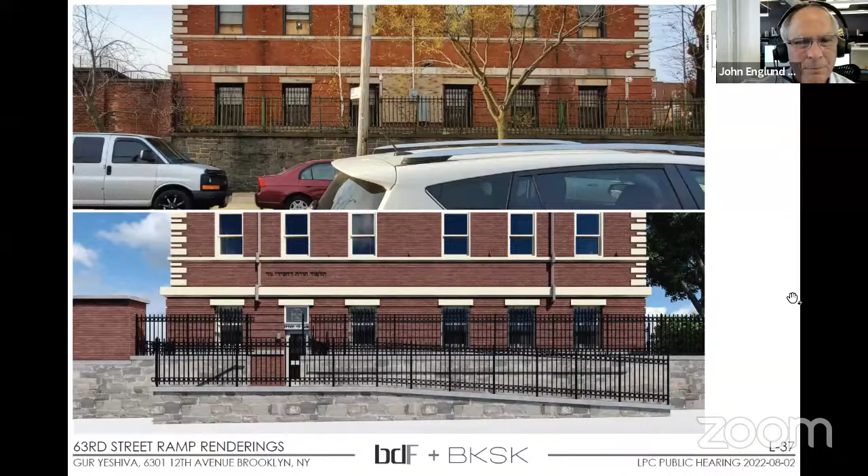Except we're sure we are retaining the gate that's lowered, we're not showing it in the rendering. Thank you, Harry. Yes, we're not showing the gate. But you are retaining the gate? Yes, we are retaining that gate. The nice thing about this gate is that it can open 180 degrees and be flat on the wall and be out of the way, unlike the other gates between the main building and the wings.

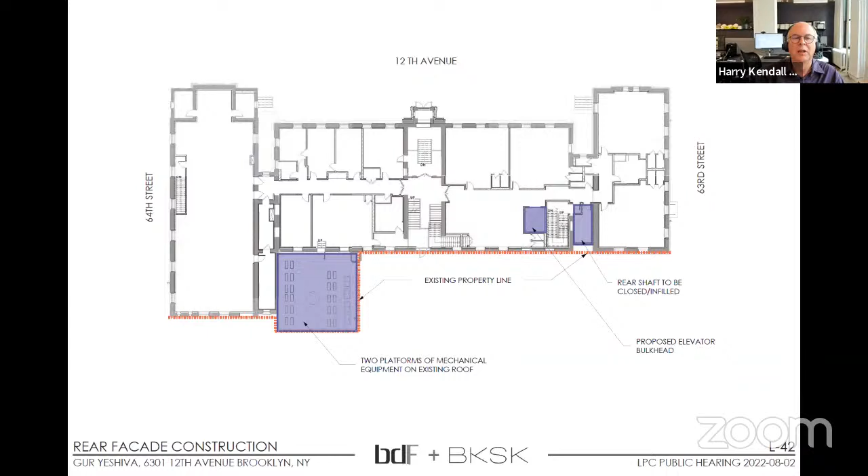Sure, Harry. While we're on this plan, the 64th Street former chapel wing, that space is open now and will still be open. It's going to be a multi-purpose space for the school involving indoor recreation. We'll be ending this presentation with talking about the stained glass windows, but that's where they are. Thank you.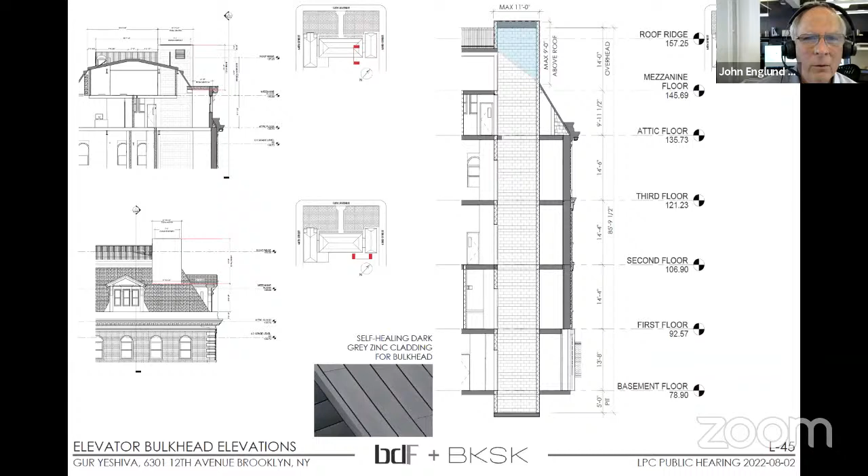Section through the elevator shaft, which as you can see serves every floor of the building. We're proposing to clad this in a gray zinc, which will at least recall the color of the existing dormers and the fiberglass cornice.

And here we have some views of mock-ups of the mechanical equipment and the elevator bulkhead as seen from 64th Street. And you can see the beginning of the new residential development, which largely obscures the view of the back of the building from 64th Street. From 12th Avenue and from 63rd Street...

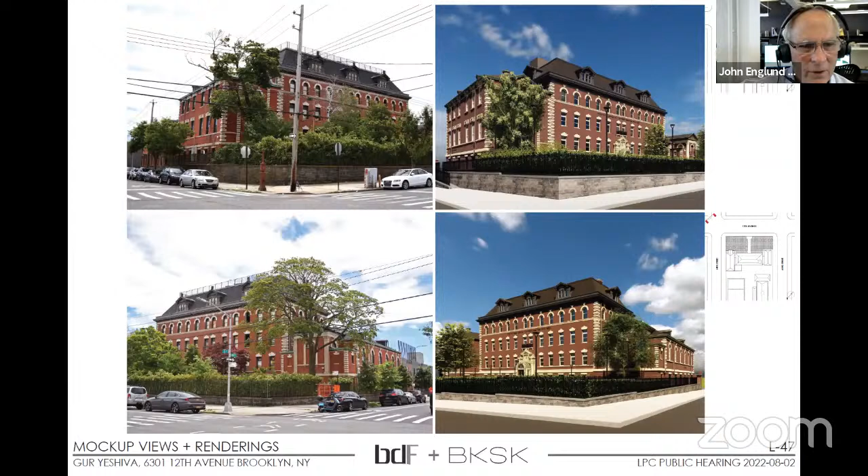Yes, sorry, and looking at the 63rd Street corner, the elevator bulkhead is visible above a corner of the building, and obscured by this tree, so we can't see the mock-up. And of course it's invisible from the 64th Street side at the lower side of the screen.

Down the hill from 64th Street, at the bottom of the screen, the elevator bulkhead mock-up. And closer to the building, again we have a mock-up here of the proposed elevator bulkhead clad in zinc, similar to the other gray materials up there at that level.

Windows, we'll touch briefly on the windows. This 1940 tax photo shows the windows in their more or less original condition. We have double hungs up in the dormers, round head windows on the top floor, and on the intermediate floors we have square head windows with transom lights. Then we have stained leaded glass windows in the former chapel. At the basement level, you can see here's a window where the original brick molding has survived, which we're planning to leave in place.

In the center is a reconstruction of the original window configuration, and we've found an aluminum window which mimics the shape of the brick mold and pretty much retains the existing sight line. So the proposed replacement is elevated on the right, and the reconstructed original is on the left at the cellar level.

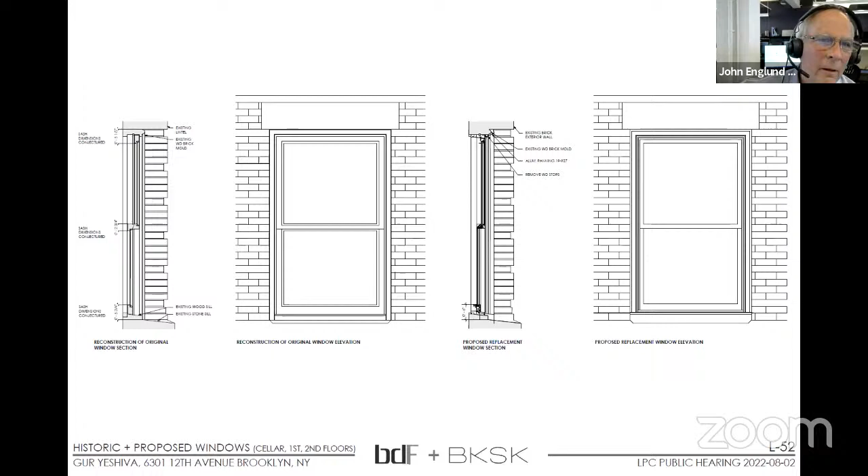And then the round head windows are similar, as are the square head windows with transom bars. And then we have a more special condition, which are the leaded glass windows in the former chapel, which Harry has volunteered to speak about.

So there are a group of 15 windows, some of them fan lights over windows, but most of them full-height windows. The designation report mentions their existence, but gives no information about their provenance or their significance. So we brought in an expert I've worked with on various occasions, Martin Rambusch, who came and spent a full afternoon on the site looking closely at the windows. He came to the conclusion, or we came to the conclusion together, but led by him, that he didn't recognize any signatures of a studio he knew that had built them. They were not of the finest quality of construction. They are in reasonable shape, but pretty deteriorated, often cracked.

And the question was, are these significant? The answer in his estimation was a resounding no. Are they nice? Yes. Can they find a new home? Quite possibly. So we got a proposal from Rambusch to remove the windows intact, store them, and use their connections to find a new home. The client is committed to this approach. We hope they can be reused and find a new home, but of all the Christian iconography on the building, the stained glass windows are in many ways the most vexing, because they're very, very explicit, and even the typology is something that is reminiscent of something that's not in their mission. So let's go to the next slide.

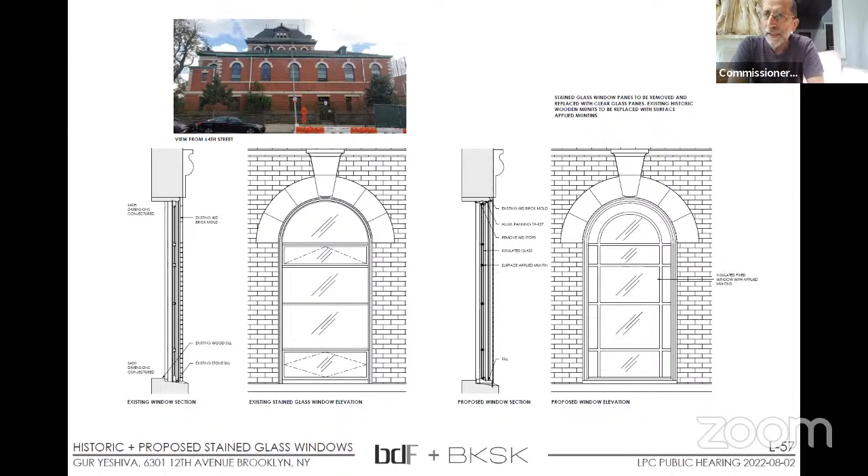The paving at the front, it looks like it's pretty much edge to edge, with the exception of the planting along the entry. Is there a particular program driving the extent of the paving? It's less paving, it's a permeable play surface. Right, but it's rubber. Yes, and it's the only outdoor space available to the school.

Right, so now I've gone too far. We have to give the kids some place to run around, and that's the only space they have. I just was wondering if there was a specific quantity or program that was driving the extent, because it looks like it pretty much goes end to end, with the exception of the hedge along the perimeter and the new edging along the extended steps.

Yes, there's the planted edge inside the fence around the perimeter and existing privet, which will remain, and a few trees. The projected population of this school could be as many as 600 students, so they need this amount of space, I think.

Okay, and grass doesn't work for them? I think it would just turn into dirt and dust. I have to say it's a north-facing courtyard. Not that the building is that tall, but the grass in the current courtyard, which has had light or no use for a long time, has not prospered. It's been substantially bare dirt for a good while.

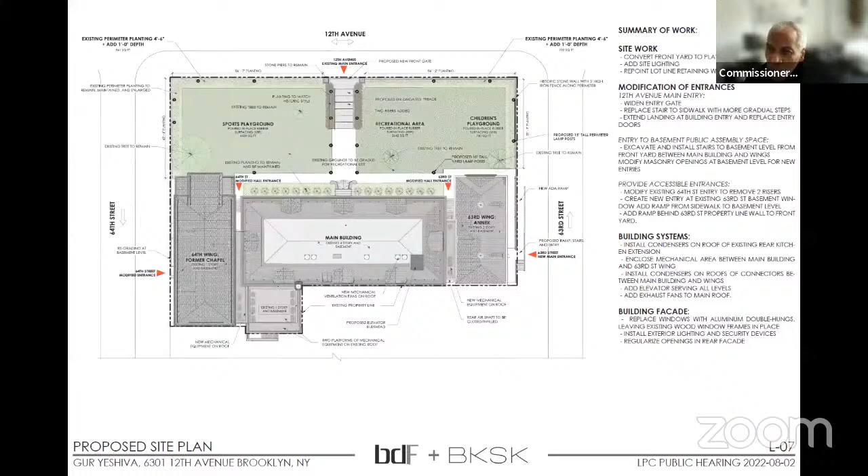It doesn't surprise us you're asking that question. There's certainly been a great deal of discussion about this - it's a complicated puzzle how to fit the program, and the size of the rooms toward the 12th Avenue side are key to maintaining the size of the rooms that fit their student population. There are many forces pushing and pulling the location of this elevator, and it landed here, with very little give in our mind.

Second question - the recreation area, are you going to have play equipment? And if so, could there be areas with vegetation around it, or does the area basically have to be completely open? I'm not sure the school has settled on exactly how the play area will be furnished, but if there's play equipment, students need to be able to run around it and not get tangled in the trees.

You could have areas that are protected, rubberized, and then have planting, so you could break up this mass of rubber in some way. It's worth noting that the surface of the ground is well above the sidewalk level and screened from the sidewalk by the hedge, so it's not really visible from the street. I don't think it will affect the building's appearance from the street, and we are retaining at least 4 of the trees in the yard - 2 beautiful magnolias and 2 others.

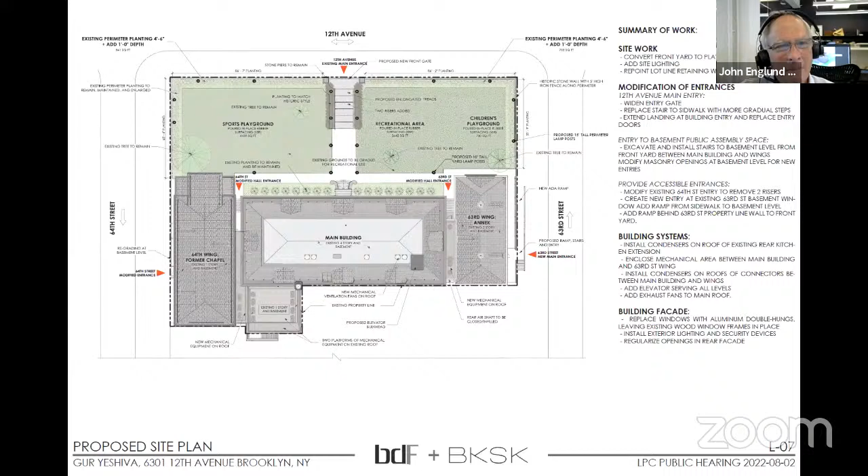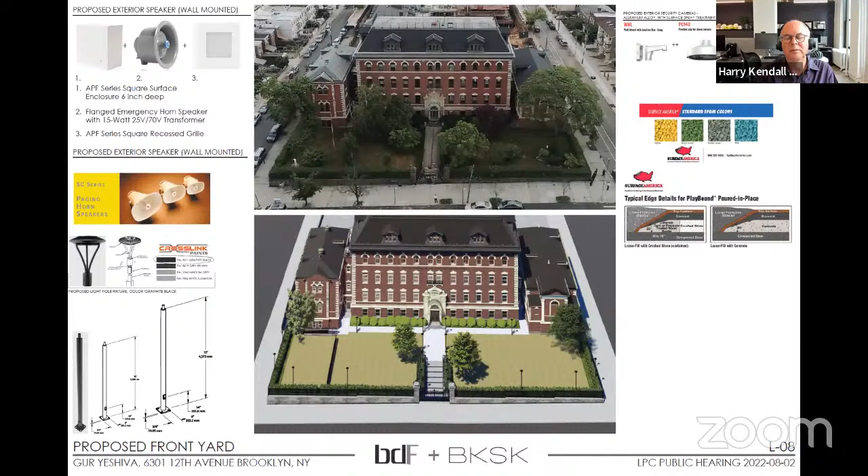Can we go to the rendering from the street, to show what you just said - from an eye level view rather than bird's eye. It's easy to imagine this massive rubberized thing as contrary to the appearance, but that privet hedge exists, it's very dense, and our commitment is to maintain it - it stays dense all winter. I can see it, it works, it's almost invisible.

Next we'll go to Commissioner Bland, followed by Commissioner Chen, and then Commissioner Devonshire. My comment is more of a comment rather than a question.

That massive rubberized lawn - I'm sure you're aware that many city parks are now using something you have to get pretty close to distinguish from real grass, a fake grass, so-called astroturf, much improved. I've seen it used at Cadman Plaza Park adjacent to Brooklyn Heights, and it's used extraordinarily heavily and has held up amazingly well. I just want to comment that would be a much more appropriate material than these rubberized surfaces that look like a hard surface but are in fact soft.

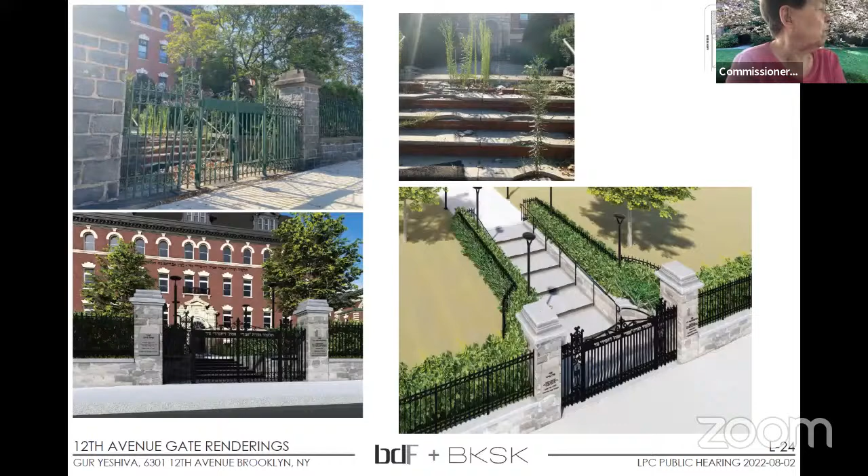I tried to make the point that the rendering is not a perfect replication of the existing terracotta, but the only changes proposed to the terracotta are to cover the plaque over the vestibule, add some signage, and remove the crosses from the round obscure glass elements, and of course the doors. But the terracotta will be unchanged otherwise.

Okay, thanks. All right, Commissioner Devonshire. What's the material of the extant landing at the front entrance, and what's the material of the proposed? Bluestone for both. Thank you.

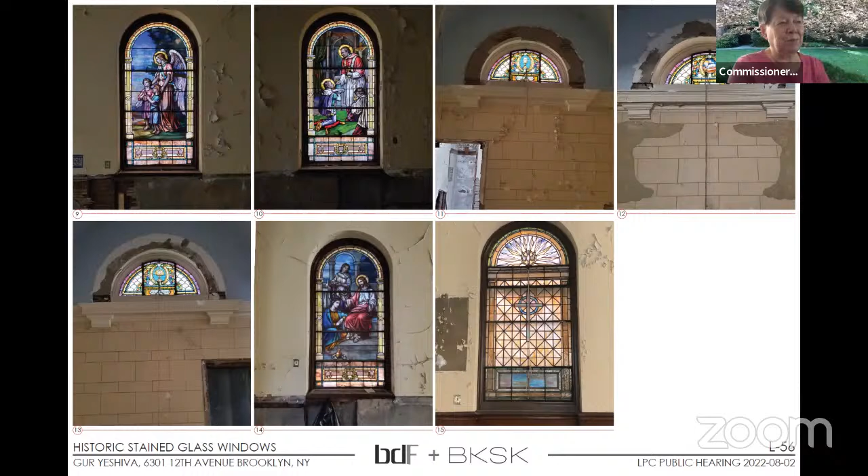Thank you for that, that's what I wondered about, whether it was meant to be something representing the name originally in some fashion, or whether it was, in fact, as you're suggesting, another situation. Thank you. Okay, thanks.

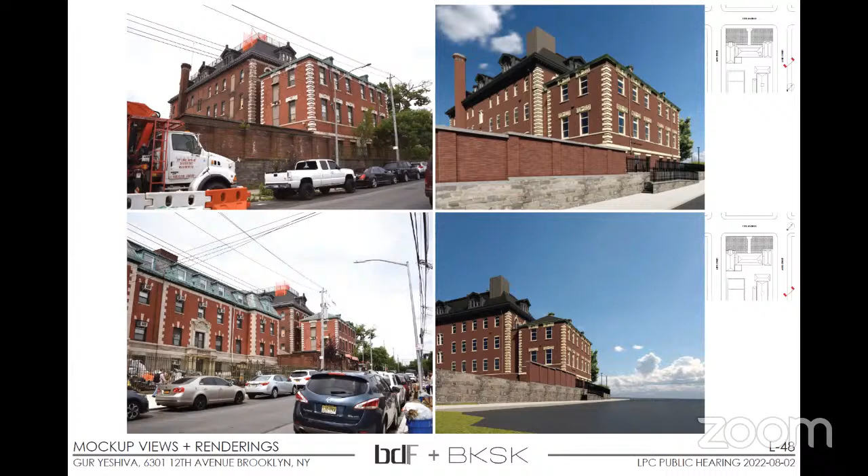I have no disagreements with anything that my colleague has stated. Especially two things: the signage, I think, is egregiously overwrought and unnecessary. I also agree about his statement about copper. If it's copper now, it needs to be copper in the future.

I'm a little conflicted with the material in the front yard. One of the things that Harry said is that because it faces north, it's sand and it's in horrible condition. I'm looking out my window at a north-facing yard that is lush and green. Part of the problem with grass is that it doesn't like to grow under trees.

All of that said, I agree with Commissioner Goldblum's statements about borders and about reducing the size, as much as possible, of the play space. But I also consider the use of the rubberized material totally necessary if no alternate is able to be found. It's ultimately reversible and can be pulled up.